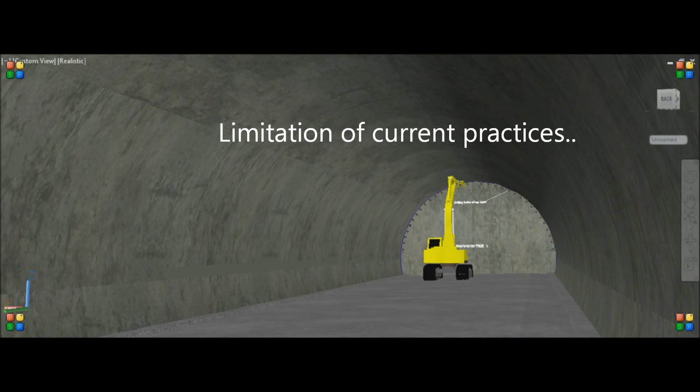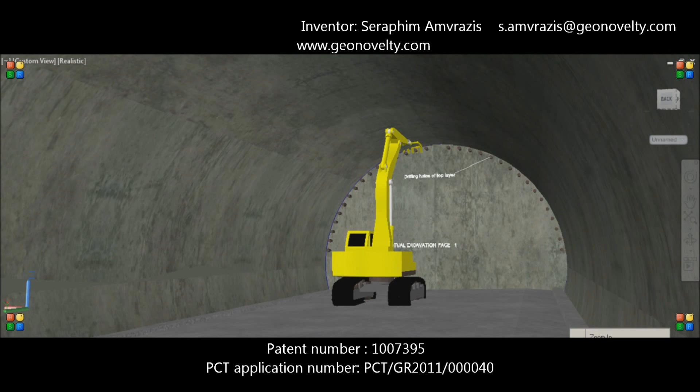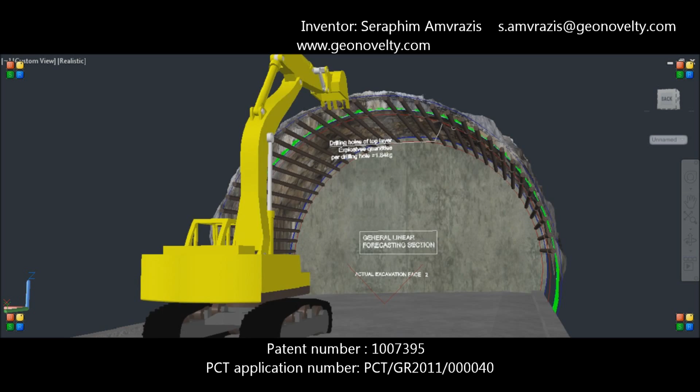Excavations during tunneling construction are not possible to approach the absolute theoretical surface. The main reason is the unexpected ground soil situations found during infrastructure work. Each excavation depends on the personal or engineer's experience, and there is a limitation of accurate decisions that would help achieve the best excavation result. This example represents the point cloud surface of an actual excavation.

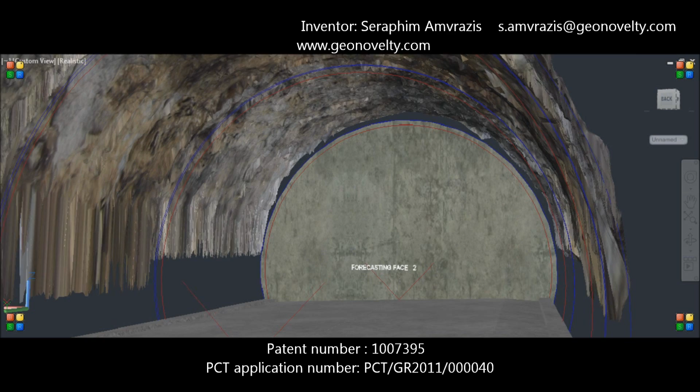In order to estimate future surface behavior so as to prevent critical excavation issues, different opinions may come from different people. The main reason behind those discrepancies is that there is no realistic excavation forecasting based on previous point cloud measures. In addition, overbreak or underbreak areas caused by bad excavation prediction dramatically increase the cost of construction.

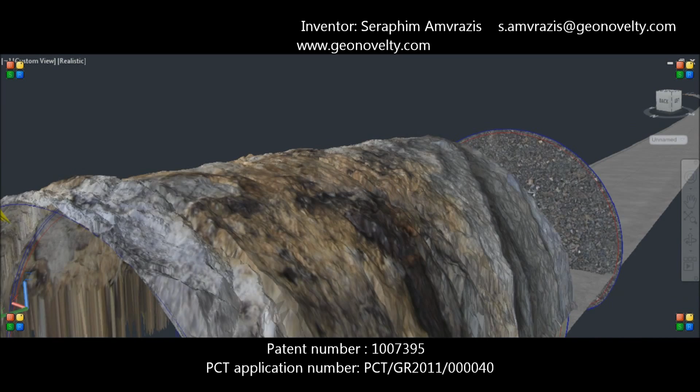Generally, the excavation behavior for each particular soil type is an unsolved issue that concerns many tunnel engineers. For every 10 centimeters of overbreak, excavation costs may increase by more than €1 million per kilometer. The domino effect that comes from bad excavation prediction follows the project until the end.

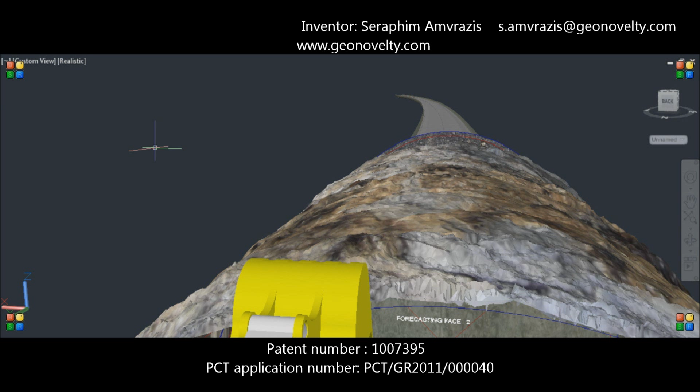1. Decreased safety. 2. Decreased excavation quality and performance. 3. Increased time schedule of works. 4. Increased project costs.

In the next steps, you will have the opportunity to learn how this particular invention provides the solution and the revolutionary approach for the unsolved issues as mentioned.

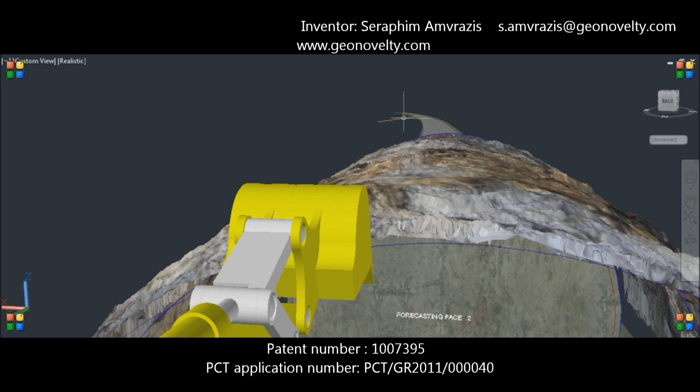As is known, point cloud measures from laser scanners represent the actual excavation surface. However, there is still no technology to take full advantage of point clouds in order to provide useful information for contractors.

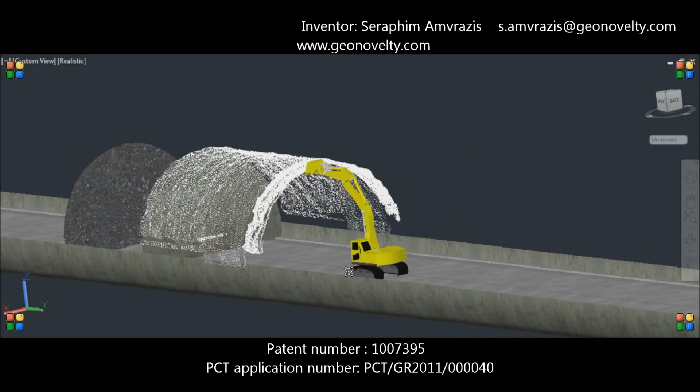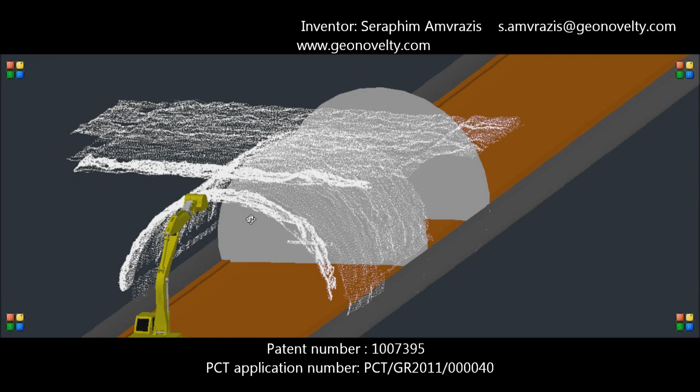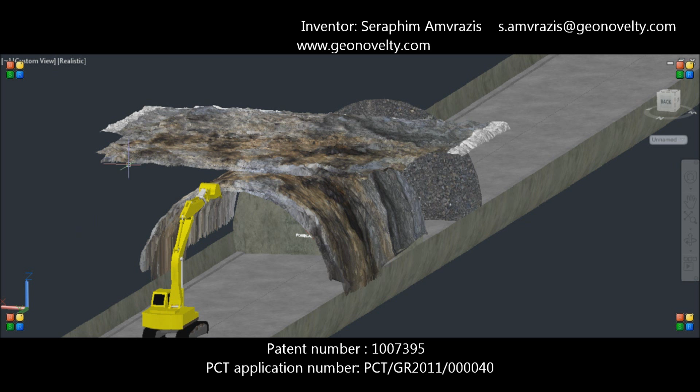When the responsible engineer or supervisor has printed the drawing of mapping, they can immediately determine the problematic regions, and without time-consuming topographic support, the work of re-establishment becomes direct and much faster.

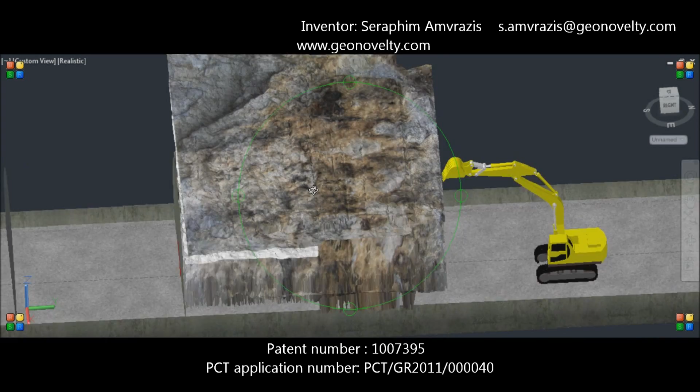Now let's turn our 3D drawing into a plane view. What we see now is the development of the excavation. The difference between original and developed excavation is clearly shown in a complete inspection view that can be easily inspected from the plane view.

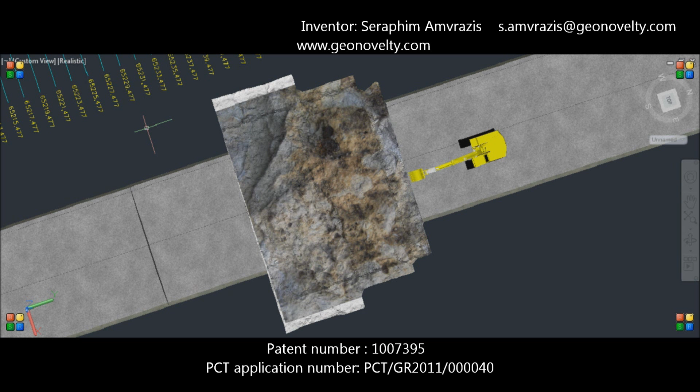The next processing step after excavation development is the calculation of the inspection view, which provides mapping information showing the difference between the actual and theoretical excavation. The combination of excavation development and mapping inspection provides the absolute inspection control which is important for the project.

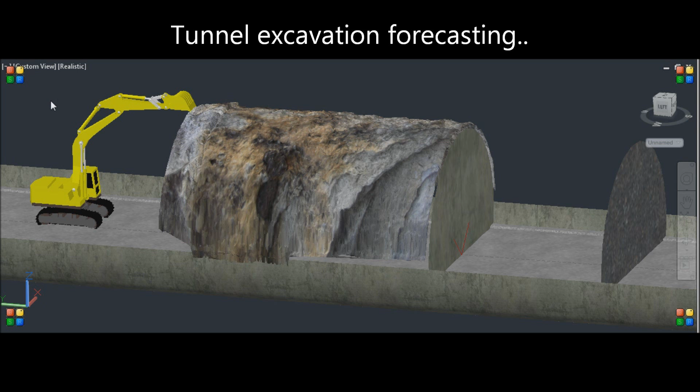Tunnel excavation forecasting provides sophisticated mathematical algorithms and a self-teaching process that learns from previous measures. Namely, the point clouds of each excavation are grouped according to each soil type. What you see now is the creation of virtual point clouds that represent the excavation forecasting estimation of the different soil types that exist further ahead of the actual excavation.

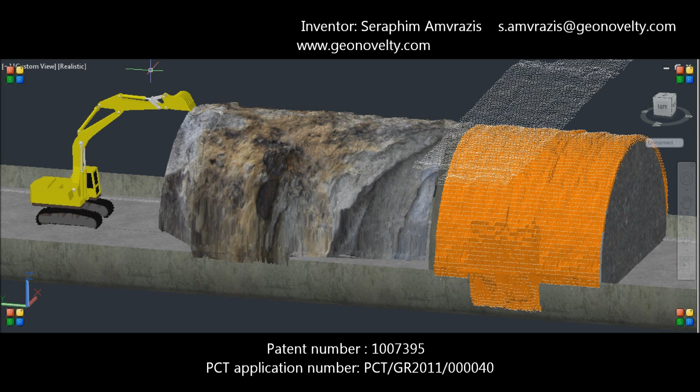In this particular example, you can see the forecasting calculation of 4 future excavations. In addition, the forecasting virtual point clouds are transformed into developed mapping. Thus engineers will have the opportunity to inspect excavation forecasts from the plane view.

Forecasting surface deformations are easily readable from the plane view, offering engineers a priceless tool to predict and prevent excavation risks. Engineers can select several forecasting parameters, and in accordance with the selection, point cloud forecasting changes.

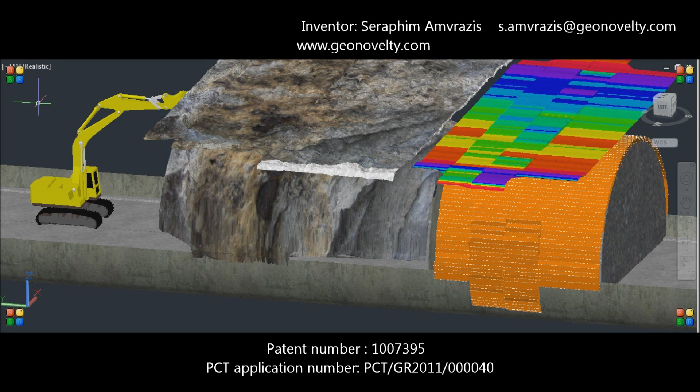This invention removes the obstacles between different opinions by adopting a common basis of forecasting information where decisions can be taken instantly, and at the same time more reliably and precisely. The combination of virtual point cloud forecasting and the reliable information provided helps engineers from different specializations, such as geotechnical engineering and survey engineering, to work efficiently together on a common base with common decisions.

Welcome to the future and the revolution of point cloud forecasting.

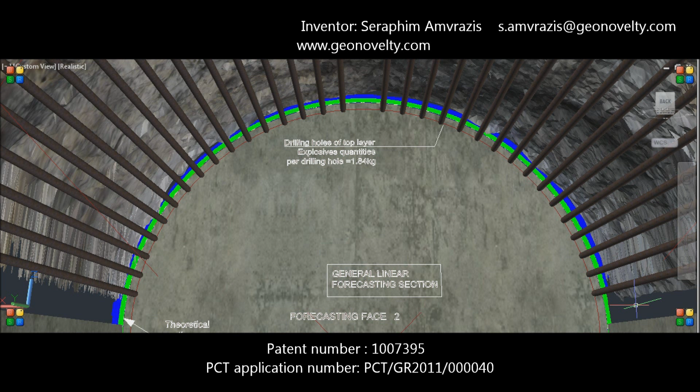Unfortunately, excavations never reach the perfect theoretical cylindrical tunnel round, so significant overbreaks or underbreaks are created. In this particular example, the edge of the green line represents the perfect excavation, and the edge of the blue line represents the actual situation.

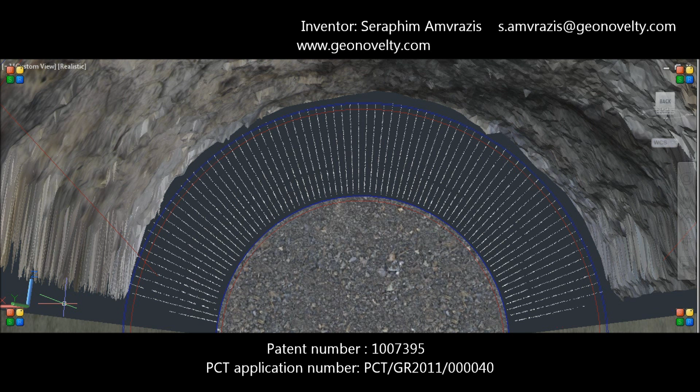As soon as point cloud forecasting is done, the explosives coordination system will calculate the recommended explosive quantities per drilling hole so as to prevent future overbreaks. Thus, the first step is to forecast an excavation that belongs to a particular soil type.

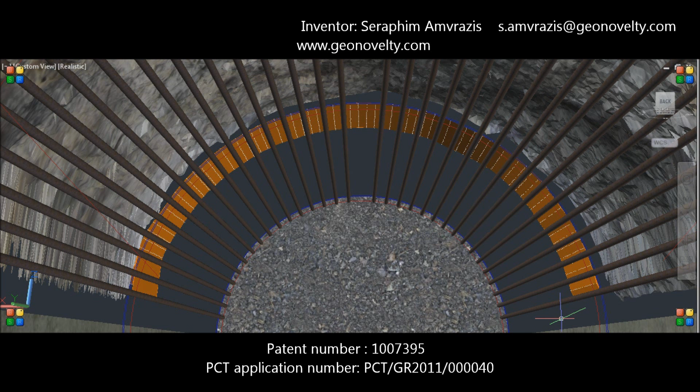The second step is to define the possible overbreaks that will exist. The third step is to define the recommended explosive quantities per drilling hole so as to prevent overbreaks before they happen. The fourth step is to update the forecasted surface, so engineers will have the opportunity to inspect the surface deformation that will result from explosives adjustments to the particular areas.

The scope is to reach the green line, which is the best possible result for our excavation. The excavation will become smoother, avoiding at the same time the additional costly fill of concrete that would be caused by overbreaks.

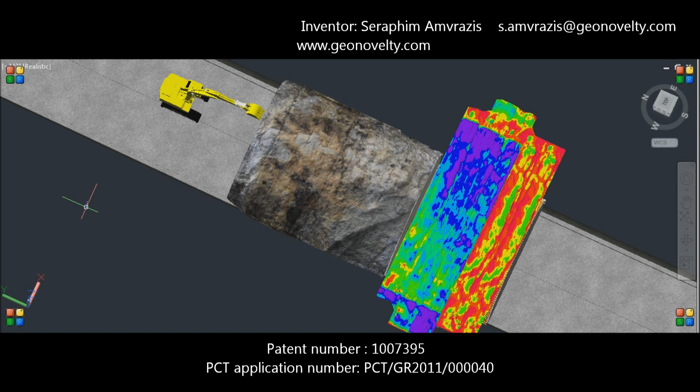Now we are going to see the effect on the surface that will be realized in the fourth forecasted excavation. The explosives coordination system will update the fourth forecasted surface, estimating how the excavation surface could look from potential explosives reduction. Namely, this particular mathematical process updates forecasting point clouds via the changes in explosives.